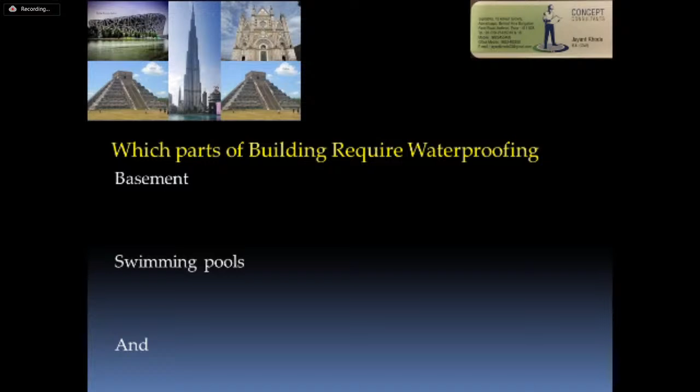And swimming pools also. Which parts of the building, because today we are going to consider only building waterproofing in the building area, so which are the areas you require waterproofing in a building? This includes basement, sunk and non-sunk slabs for toilets, attached terraces, overhead water tanks, underground water tanks, swimming pools, lift pits, podium slabs, top terraces, and expansion joints.

So expansion joints also need waterproofing, we will see that. Waterproofing is to be done during construction, and also after the structure becomes old, you require waterproofing.

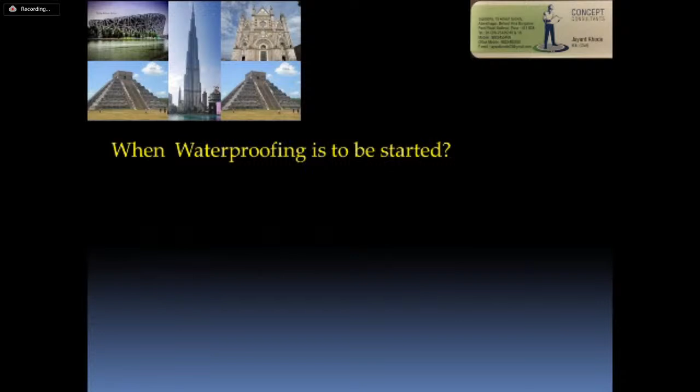In new construction, during design time only, we have to consider different methods so that an effective system of waterproofing can be designed, which will work as per the requirement of a structure.

In old structures, perfect diagnosis is required so that without much breaking, we can do cost-effective waterproofing. It is like medical science, like a doctor diagnosing your health. We as a waterproofing concern have to diagnose the waterproofing problems, why and where the real problem is, and according to that, we will design a system.

Why is appointment of a waterproofing consultant required? Nowadays different consultants are operating on site, so waterproofing consultant is also a need of the time. There are different consultants working on site like foundation, RCC, plumbing, electrical, AC consultant, landscape consultant, acoustic consultant, so why not a waterproofing consultant?

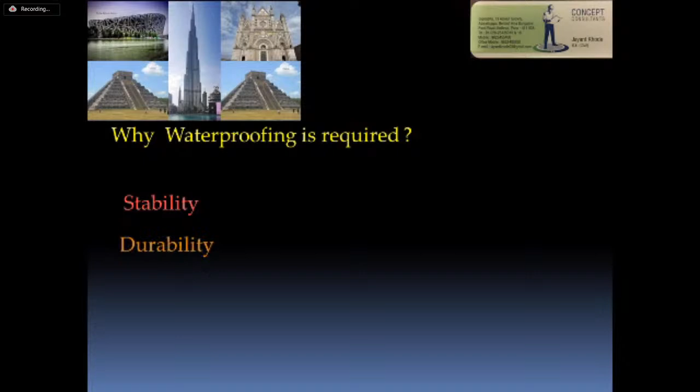Why is waterproofing required? Waterproofing is required for four basic things: stability of a structure, durability of a structure, aesthetic of a structure, and hygiene of a structure. People are going to stay in that structure, so they should have a healthy atmosphere. That's why waterproofing is also required to maintain the hygiene of the structure.

What is the definition of waterproofing? Waterproofing is a systematic method with which we can control entry or exit of water through a structure as per our wish. So waterproofing is not a magic, it is a systematic method, or a science, so that step by step at every stage, if you consider the waterproofing part, then you can control entry of water where you require it to be controlled.

Like basements and lift pits, you require that water should not enter your structure. Where you require exit, in swimming pools or water tanks, you don't require water to exit the structure. So in both cases, entry and exit, you require waterproofing. This has to be considered from the design stage itself.

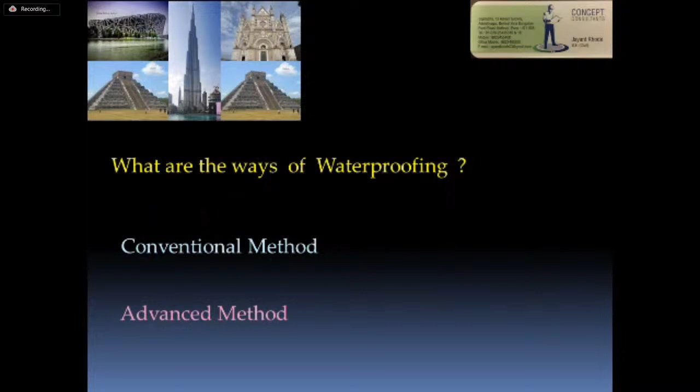There are two methods of waterproofing: one is the conventional method, second is the advanced method. We're going to see all these methods.

Conventional method defines that for so many years, people have been using a few methods of waterproofing. They are trained in that, they have developed confidence in the methods because these are age-old methods. We call these methods conventional methods. These are the few methods of conventional waterproofing: integral waterproofing, brickbat coba, IPS, injection grouting, box type waterproofing.

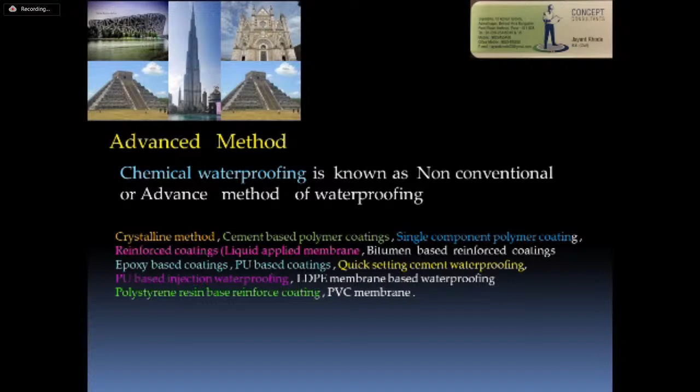Advanced methods: chemical waterproofing is known as the advanced method. Why is it called advanced method? Because only in the last 20 years has this method been developed, and today there are different chemical companies manufacturing high bond strength, high flexibility, elongation property polymers, so that they can use that in bigger span buildings for waterproofing. These are the methods of advanced waterproofing. We are going to see all these methods, but first we have to brush up.

Both methods of waterproofing are useful for concrete. So before going for waterproofing, we should know about concrete.

As you know, because you are all engineers, concrete is made up of sand, cement, aggregates, and water. These give the strength of concrete we manufacture on site. Mortar is an admixture of sand, cement, and water, and these are the different proportions of mortar we normally use on site.

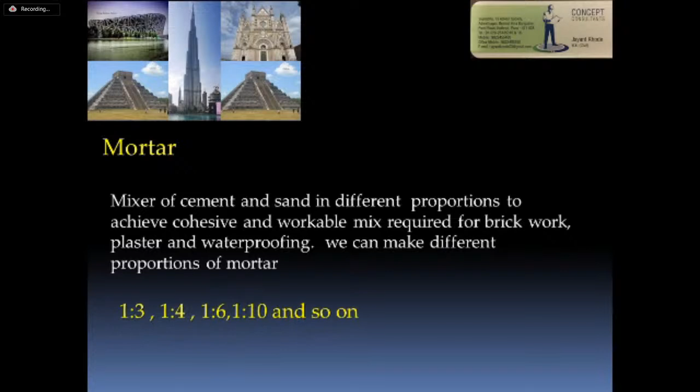What are the limitations of concrete and mortar? Basically, cement is the basic binding material in mortar and concrete, but it has an inherent property that gives you cracks. Shrinkage cracks is a basic property of cement, and that property gives problems of waterproofing.

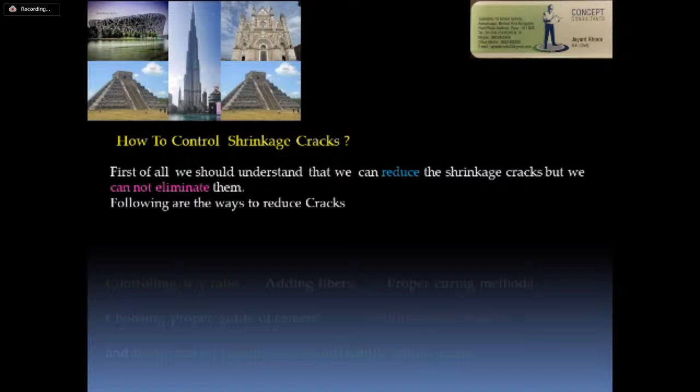How to control the shrinkage cracks? One thing you have to remember is that we can control cracks, we cannot eliminate the cracks. Shrinkage cracks can be controlled by many methods. These are the methods by which we can control the cracks, and we are going to see all these methods in our presentation.

By adding fibers and aerating agents, we can control the water cement ratio. You must have heard in your concrete technology that by reducing water cement ratio, we can increase the strength of cement and reduce the shrinkage cracks. So if you can reduce the shrinkage cracks, you will reduce the waterproofing problem.

Now understand, here's a video, we'll see that video.

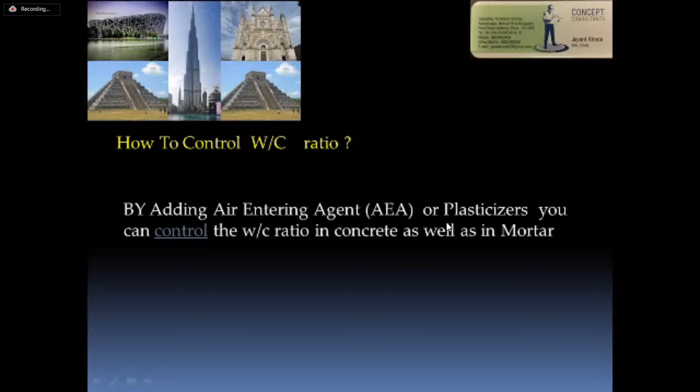So with such types of chemicals, you can reduce the water cement ratio and reduce the shrinkage cracks in the concrete or mortar. You can add fibers also in the concrete to reduce the shrinkage cracks. These are polypropylene fibers, and these fibers give you a three-dimensional reinforcement. Normally, the steel which we use gives you only X and Y direction, but these fibers give you three-dimensional reinforcement, and such reinforcement reduces shrinkage cracks by about 85 to 90%.

Let's see, we have got something to work here. Let's see which video is there. Fiber reinforced concrete, brought to you by Lance Kilbride, Danny Henson, and Derek Dooms. We'll see a different video.

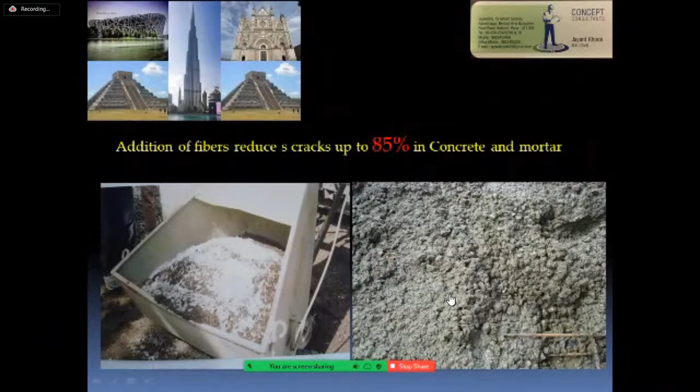In this video, I'm going to show you that the concrete which has been made with fibers will be very difficult to break. The concrete which has not been made with fibers will break within a second. So you can watch this video and understand how fibers give you more strength against cracking and breaking.

Okay, perfect. So you have seen that within 3 or 4 seconds, a concrete without fibers broke. But now we will see concrete with fibers. Okay, ready to go when you are.

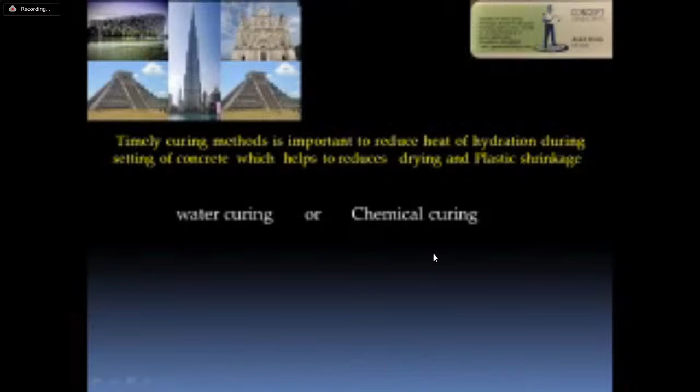Curing also gives you better results to reduce the shrinkage cracks. There are two methods of curing. One is water curing, second is chemical curing. This is a coating we can directly use on concrete after de-shuttering, so that it will form a membrane. That membrane will not allow the water available in the concrete to evaporate out, and the same water is utilized for curing of the concrete. So one is water curing, but nowadays people are using chemical curing, which is called curing compounds.

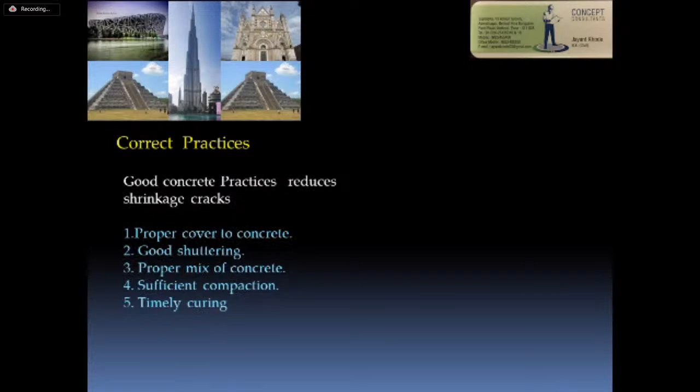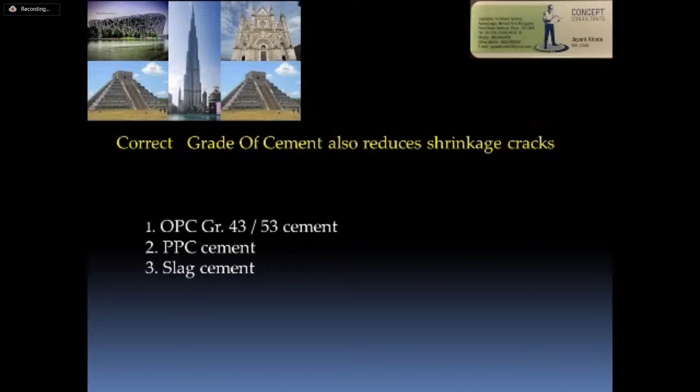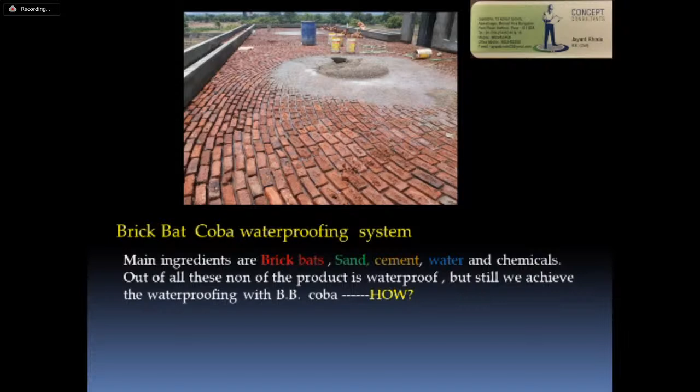Again, brick bat coba, such type of waterproofing, these are the red bricks people use for waterproofing. It gives a better slope. So this system is basically by using brick bats, sand, cement and water, gives you a waterproofing. This is not a waterproofing because it provides you a good slope, and because water doesn't get stagnant on your terrace, it flows off very efficiently.

So in fact, other way it gives you a waterproofing. But all materials like brick bats, sand, cement and water, they don't have any waterproofing quality inbuilt in it. So brick bat coba is not waterproofing again, it is a good drain system.

IPS waterproofing is again a same system to give you a slope, but where you require a lesser thickness or very small slabs, span-wise slabs are small, there people use IPS. IPS is Indian patent stone waterproofing. Instead of bricks, here they use a small stone or metal size, 3/4 inch to 1 inch metal size they use for waterproofing, and that's why it's called Indian patent stone waterproofing. Otherwise, principle is same to achieve a good slope.

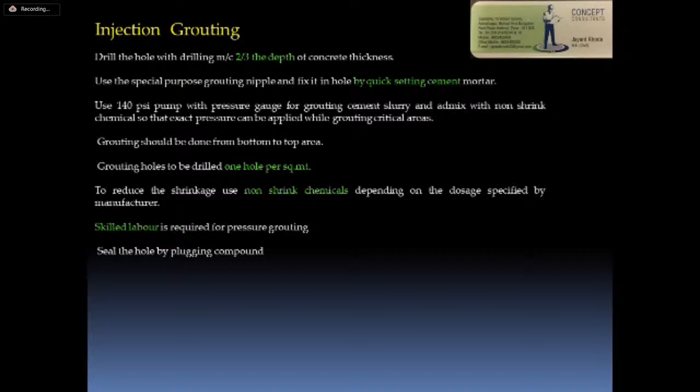Injection grouting, this is a cement slurry grouting. You use a cement, you use a water, some few chemicals to be added in that mixture and make a slurry of this and inject that slurry by gravity grouting or by machine grouting. There are few pumps available in the market with which you can inject a cement slurry which will go in the concrete structure and seal the porosity in the concrete, and in other hand you will get the waterproofing. I'll show you a video here.

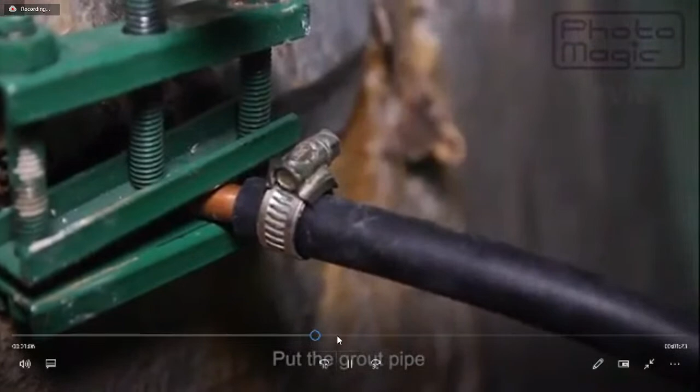This is the way they drill the... this is a mechanical pump. It has got PSI pressure, something about 1000 plus PSI. And with the help of this pump, this is a ready-made chemical which can be used for grouting. It comes as a powder. You have to add water in this chemical. We'll see this demo.

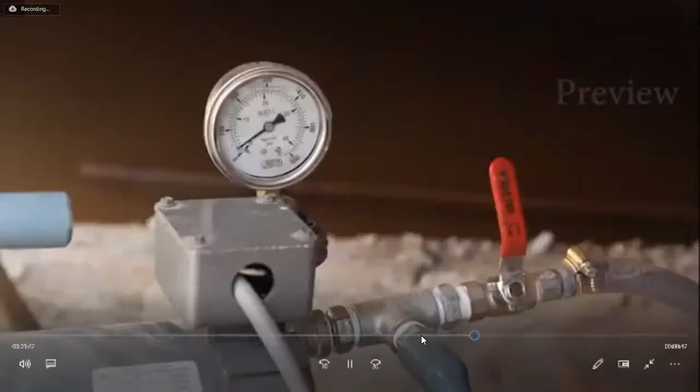So now with this pressure, the contractor is pushing this cement slurry in the concrete. This is a bad concrete. This is going inside the concrete and sealing the porosity in the concrete. After the particular level pressure has been achieved, they will stop this grouting and they will seal this hole.

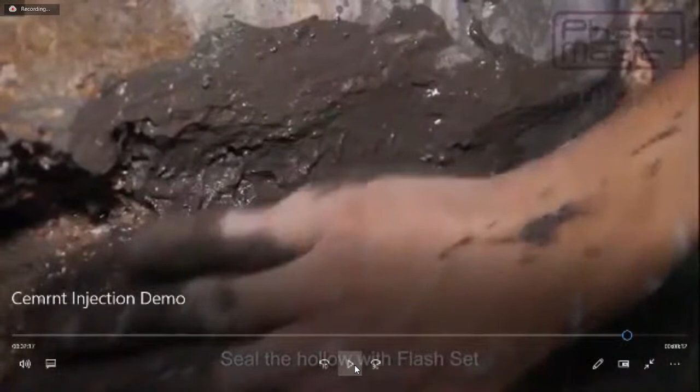This way, they are sealing the holes so that entire slurry goes inside the concrete. It sits there and permanently water has been stopped. Now we'll go for an advanced method of waterproofing. As you know already, chemical waterproofing has been known as advanced waterproofing, and there are different methods of waterproofing. So step by step, we'll see all these methods. Let us go ahead.

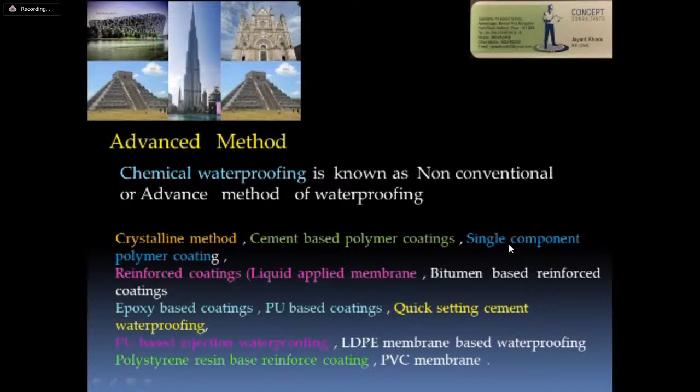Crystalline method. Crystalline chemicals are the chemicals which can be applied on a concrete, freshly laid concrete, and these chemicals react with the free lime available in the concrete and seal the porosity in the concrete, and entire concrete becomes waterproof. I'll show you a video of this. This is the way it becomes, and here's a video.

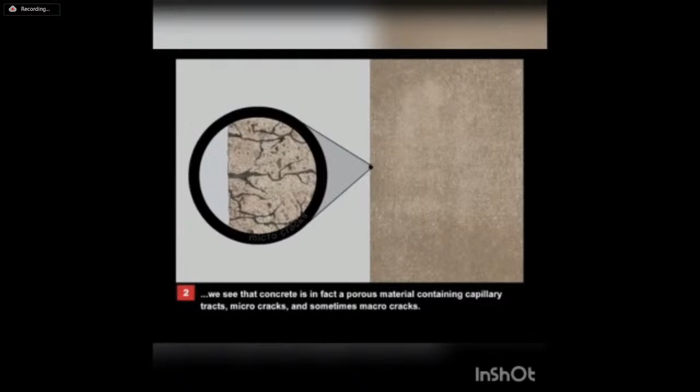Concrete appears to be an impermeable solid mass. However, upon close examination, we see that concrete is in fact a porous material containing capillary tracts, microcracks, and sometimes macrocracks. This is a magnified view of a capillary tract in concrete. Note that the walls of the capillary are lined with the byproducts of cement hydration and unhydrated cement particles. When concrete is wet, the capillary tracts become saturated with water. Calcium hydroxide and other soluble byproducts of cement hydration dissolve in the capillary water, while unhydrated cement and other non-soluble materials remain on the walls.

For existing concrete structures, the Xypex crystalline technology is applied as a coating to the concrete surface.

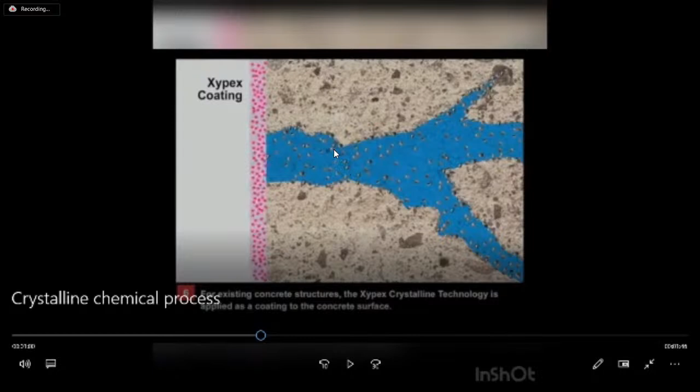This is a red color, is a chemical which we normally apply on a saturated surface. So with the available water in the capillaries, they will form a reaction with the available free lime in the concrete, and then this is the way they will form the crystals.

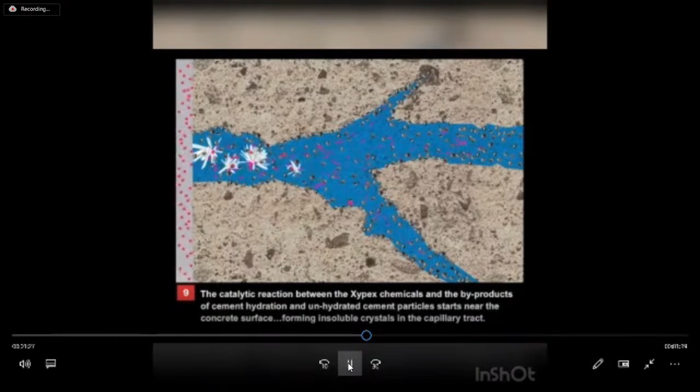When the highly concentrated Xypex coating comes into contact with the capillary water, a chemical differential is created. Driven by this chemical differential, the diffusion of Xypex reactive ingredients into the capillary begins. The catalytic reaction between the Xypex chemicals and the byproducts of cement hydration and unhydrated cement particles starts near the concrete surface, forming insoluble crystals in the capillary tract.

So this is the way crystalline method is to be adopted for waterproofing. This can be very easily applied on site. No skilled labor is required. And this is also a very economical method. This is a small drawing we can share with you. Already you are getting this recorded, so you can have this drawing of waterproofing.

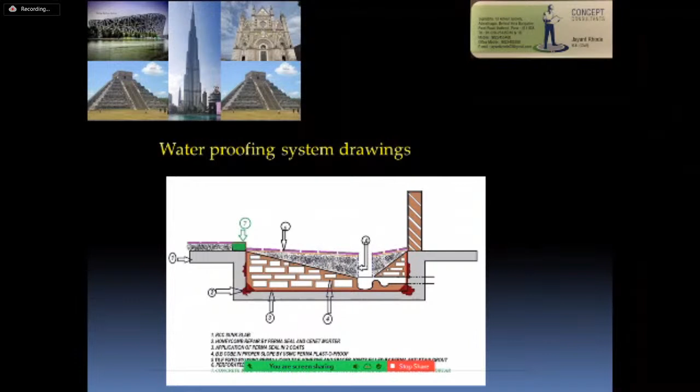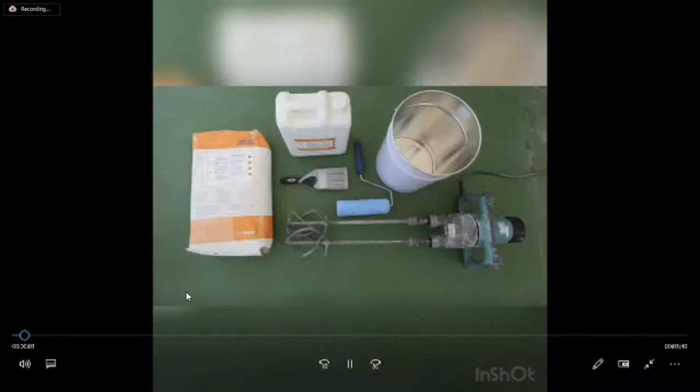Another method of waterproofing is cement-based polymer coating. So there are two components, a powder and a liquid, mixed together and directly applied on a surface. We'll see this demo. This is a liquid component. Now it is a powder component. They are mixing on the site as per the pre-measured quantity supplied by the manufacturing company.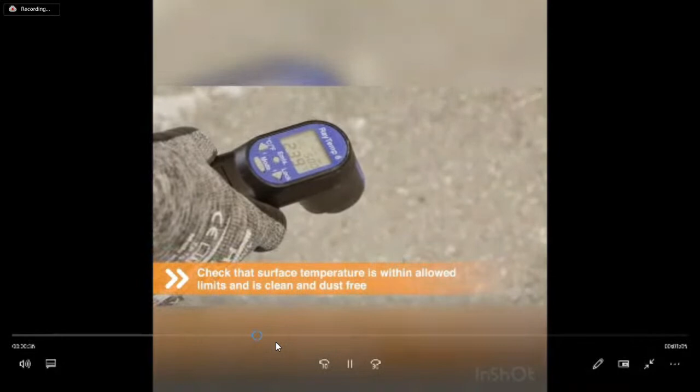You have to also see that the applied temperature of the concrete should be lower. You cannot apply on hot concrete. Normally in the summer season, concrete temperature goes up to 60 to 65 degrees centigrade. So on that hot concrete, you cannot apply such type of things. So you have to control that temperature by spraying water on the concrete and reduce the temperature. And once the temperature reduces, then start application of the coating.

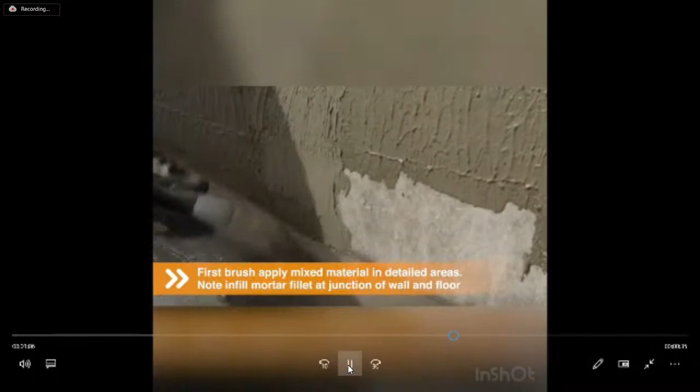This is a crack filling and honeycombing repair in the concrete. Now you can apply with a brush. Or you can use a roller also, which will give you a very good smooth finish and desired coverage on site. So this is a method of cementitious polymer coating for concrete slabs.

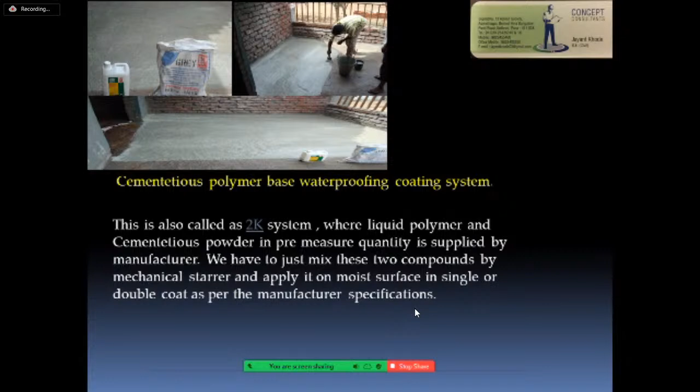If a span of a slab is more than maybe 1000 to 2000 square feet, then you require slightly better flexible material, and such type of acrylic coatings are available in the market, which have a flexibility of about 300%. In this type of coating, no cement is required. This is a ready-made product. No curing is required. It is directly to be mixed with water and applied on the concrete slab. I'll show you a video of this.

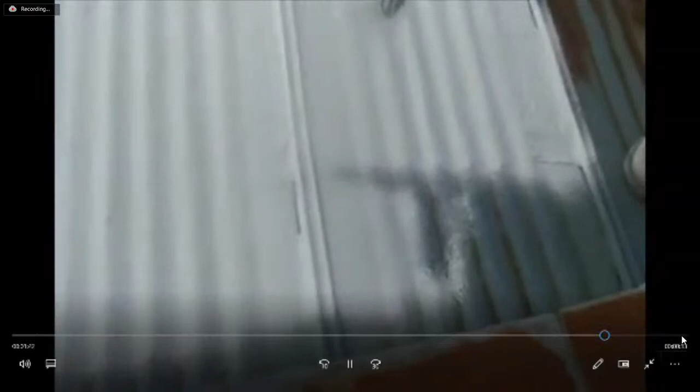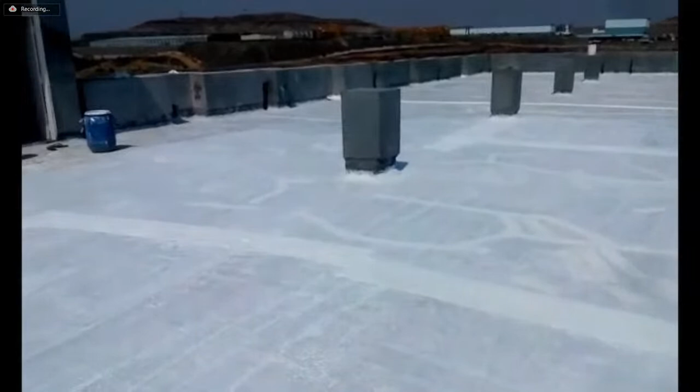You can also use rollers. This is a terrace where the applicator is using a roller, and then it doesn't require any protection because such coatings are UV resistant and you can directly walk on this surface. Nothing will happen to these coatings. Normal walking or pedestrian traffic is absolutely okay. This is a site, I think, one of our applicators has done on the Pune-Satara road.

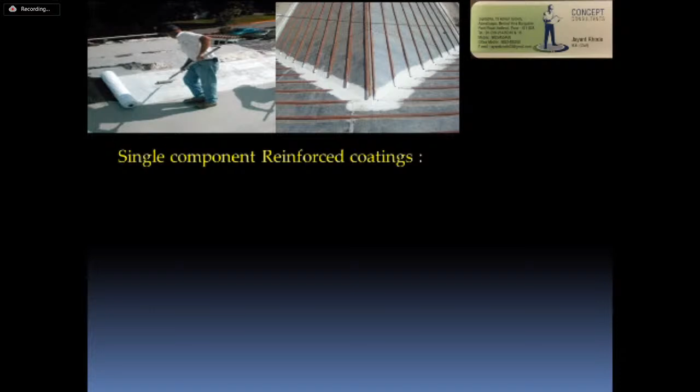Now, if the span is still bigger, people are using about 5,000, 10,000, 50,000 square feet area, then you may go for a reinforced coating. The same product chemicals are used with some reinforcement, and then you get better tensile strength in the coating, which will resist future cracks in the concrete. I'll show you the video. So if the span of the concrete is huge, then you can use such type of reinforcement.

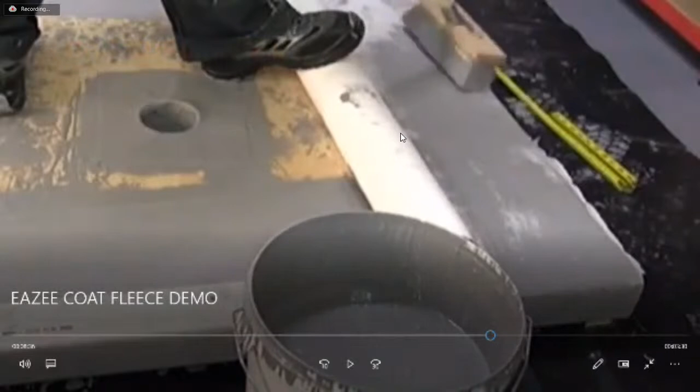Fabric, and lay along the perimeter. This white color fabric is a coating membrane. Place the trim onto the wet coating and fix mechanically in place. Lay the field area, 1000 millimeter fabric, up to the horizontal edge of the trim. Coating, fabric, coating. This roll is called a reinforcement cloth or fleece. In our technical term, we call it fleece, F-L-E-E-C-E. And the thickness of this cloth depends upon what DFT, dry film thickness, is required for the coating. It ranges from 50 GSM to 150 GSM. This all depends upon the site condition and the consultant requirement.

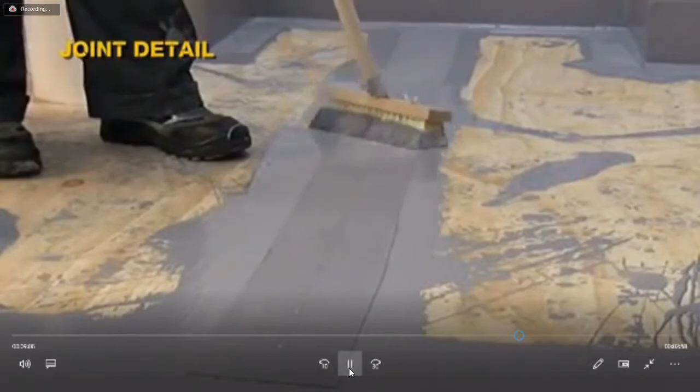Before proceeding with the field area, use 250 millimeter wide fabric to lay the perimeter detail. Coating, fabric, coating. Joint details: using 150 millimeter fabric across all joins in the deck surface. Coating, fabric, coating. Line up the 1 meter wide fabric roll with the edge of the deck, overlapping the existing detail work. Care should be taken to line up the fabric roll so that a straight edge can be achieved for the length of the pass. Apply a base coat.

Use the brush with a prodding motion to firmly embed the fabric. Fold back the outer section of fabric and apply a base coat up to the perimeter. Fold back and embed the fabric using the brush. Apply a base coat of liquid. So this is the way people are using membranes in waterproofing. These membranes are called reinforced membranes, which will give very good tensile strength to your waterproofing coatings.

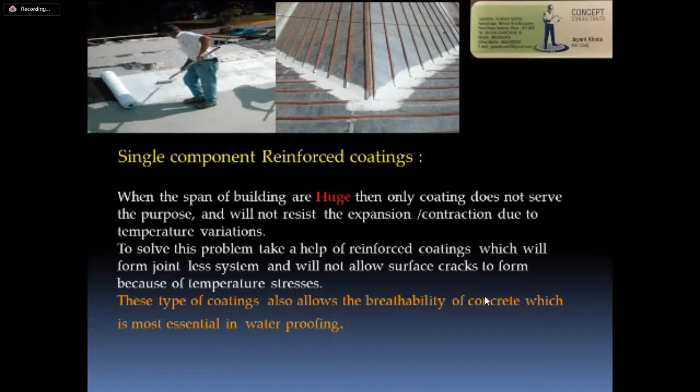Bitumen-based waterproofing. This is a very old system, but now people have changed the specification in the system. Bituminous reinforced coating has also been used.

There are two methods of this membrane. One is torch-on applied; a petrol torch is required to lay this membrane on the surface. And secondly, this is a cold applied thing, so people use primer to apply the membrane or the coating. This membrane comes in the sheet form and can be directly applied on a surface.

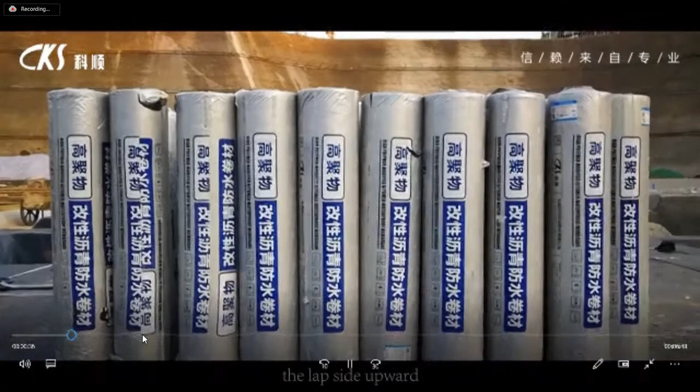Yeah, this is a torch-on membrane. So people are using a torch. the lap side upward, inside and outside, and then cut a piece of round shape. So this is a torch they are using. Next, hot melt the overlap edges.

Use a spraying gun to fully bake the overlap edges until molten bitumen is extruded from the edges to form a uniform 8 mm bituminous strip. And make sure the two layers of the overlap edges are fully bonded. At the end, put bricks on top of the position.

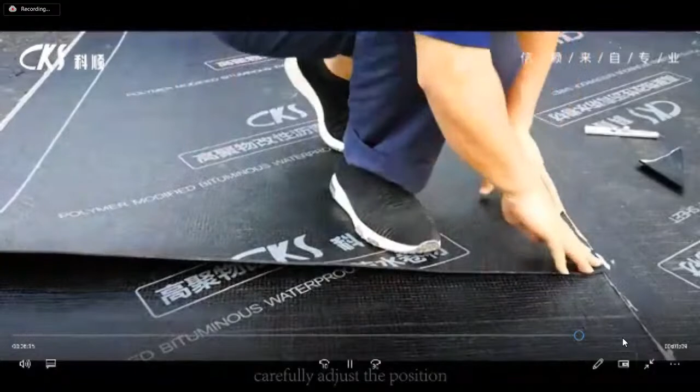And roll the membrane after the stress is released, about half an hour. Then start the large area point bonding construction. Bond no less than 5 points per square meter. The 7th step, lap joint construction. The overlap edges should be hot melt fully bonded.

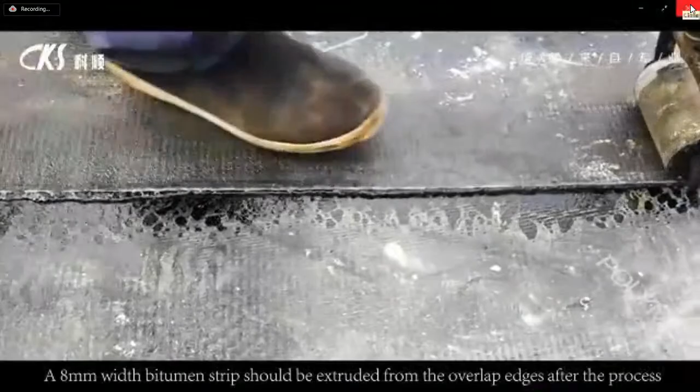One worker conducts the hot melt procedure while the other worker follows after him and performs the air exhaust and compression process with a large press roller. An 8 mm width bitumen strip should be extruded from the overlap edges after the process. So this is the method of bituminous membrane by torch-on, hot torch. But there is another method. Let's see.

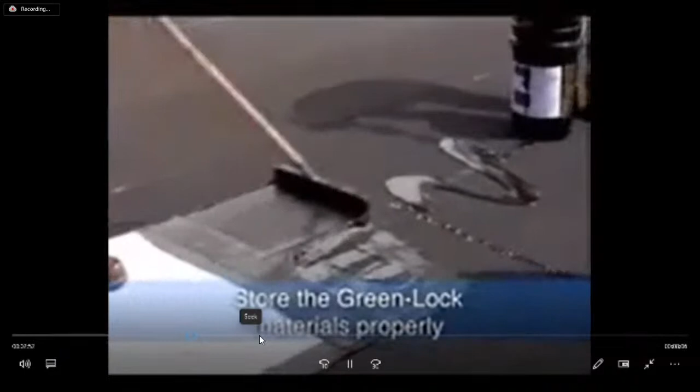Yeah, this is one which can be used by a primer method. I'll show you this, I'll just slowly go. The Green-Lock products will take longer to cure. Store the Green-Lock materials properly to protect them before use. Keep dry and at 70 degrees Fahrenheit for complete requirements.

Epoxy-based waterproofing is another method where hardener and resin are mixed together and applied with a brush or a roller so that you get a continuous membrane form. This becomes a plastic membrane. But friends, this method is not UV stable. You have to put plaster or some cover on this epoxy membrane so that it will give you better life. You cannot keep these membranes exposed. Let's go further.

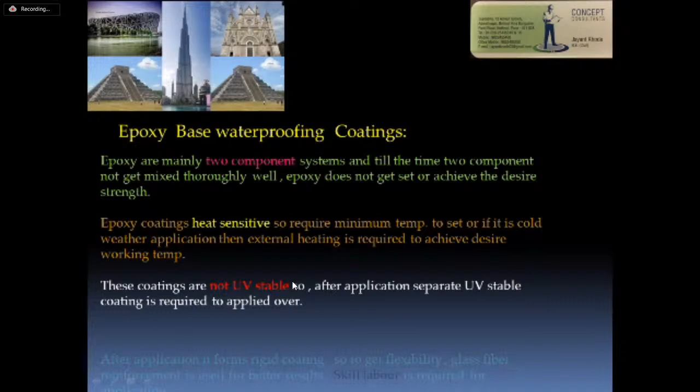Quick setting cement-based waterproofing. Many times on site, we observe that while doing concreting, we come across oozing water from the basement. We'll see that video. Till the time we don't stop that oozing water coming from the ground, we can't do the concreting. In such a situation, you require a fast setting plugging compound which will stop your water instantly, and then after stopping the water, you can start your concreting.

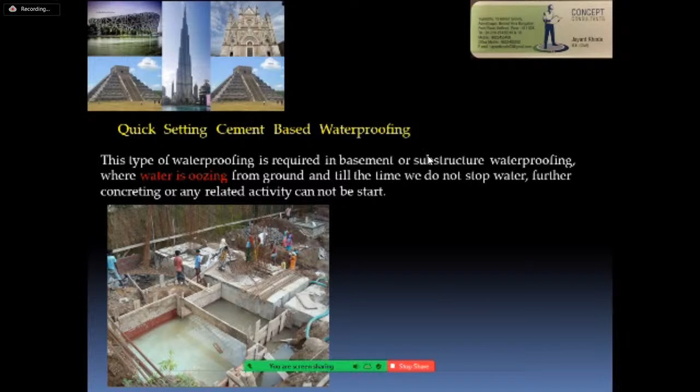Now, if that oozing of water is there, we just can't do the concreting because water will get mixed with the concrete and the strength will be reduced, or will not be achieved. But next, what will happen? This is a fast setting cement. You can see.

So you have seen that this oozing water can be stopped within 30-40 seconds, and then you can take up further concreting. So such quick setting cements are also required on site to stop oozing water from rocky or maybe from sandy soils.

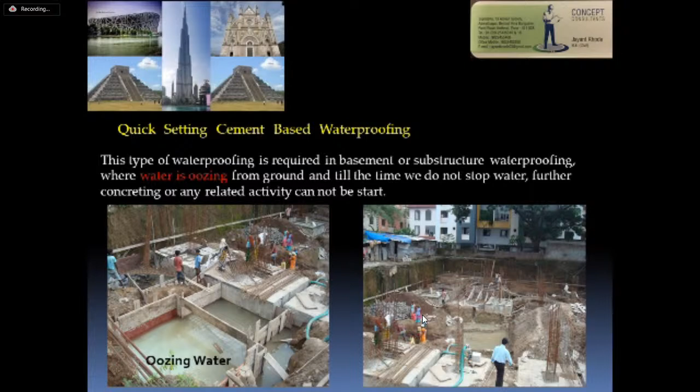LDP membrane waterproofing. LDPE stands for low density polyethylene, and this is a ready-made membrane. The size of these membranes comes from 25 meter by 7 meter. That is, one piece of this membrane is around 2,000 square feet. If your basement size is 5,000 square feet, then hardly 2.5 membranes are required. Then there are no joints.

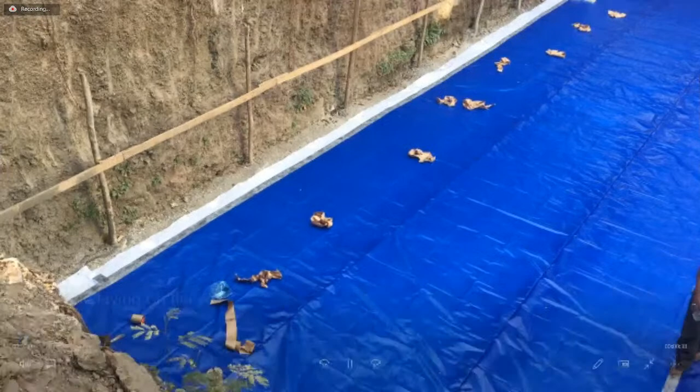It's an almost jointless system, and this is loosely laid on a PCC, and after that you do the concreting so that the water rising from the bottom is completely stopped. I'll show you some videos here. Yeah, this is the way people use this membrane. This is a membrane loosely laid on the site. This is before the raft has been done, and this gentleman is doing joint sealing.

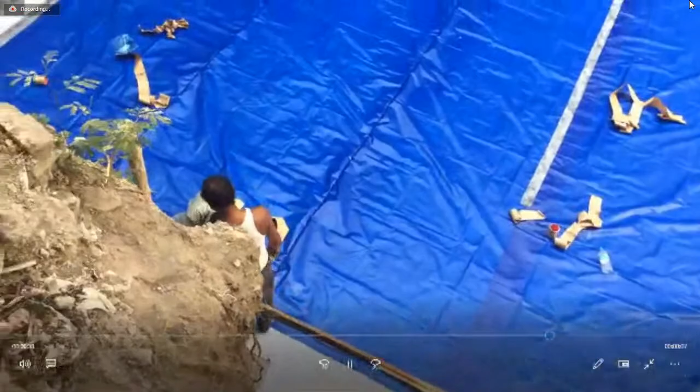This is, I think, a 5,000 square feet site, and very few joints are there. Only one joint here, the next joint is there. So this is the way people are using this membrane. After that, they seal the joints.

This is the way they seal. This ready-made tape is available, and after that tape, they are using this polymer coating, which will give better strength to the joint, and the joint will not give any leakage. So this is the way they use joint sealing.

And these are detailed photographs, step-by-step photographs of how people use such membranes on site. This is LDPE, low density polyethylene. Once it goes below the ground, the life of this membrane is more than 100 years. If it's kept exposed, the life of this membrane is 25 years. So below the ground, it is more than 100 years. Cost-wise, it is very, very economical as compared to box type waterproofing.

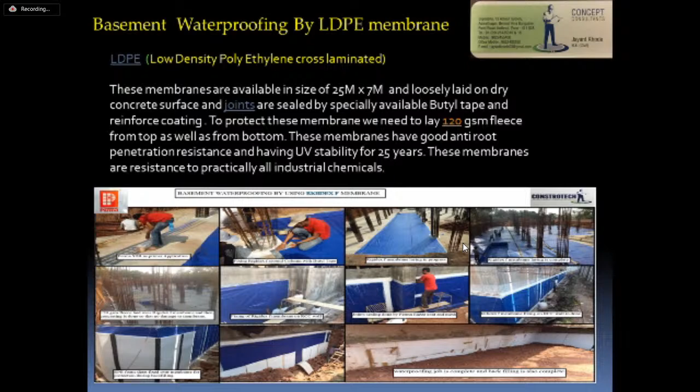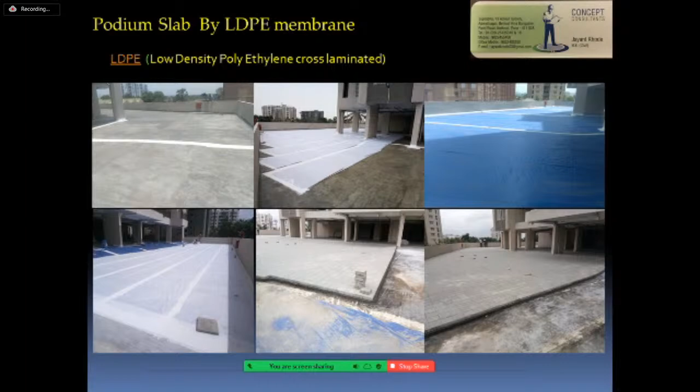Now we will see a different membrane, called butyl membrane. These membranes are ready-made tapes, and these tapes can be used to seal metal-to-metal joints or industrial J-hook joints. These are ready-made things. I'll show you a demo here.

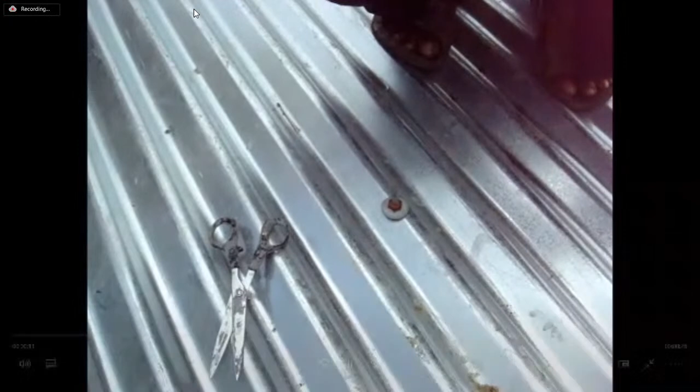This is a J-hook. Normally these J-hooks get rusted and water starts penetrating from the J-hook in the industrial shed. So we have to seal the joints by using butyl tapes.

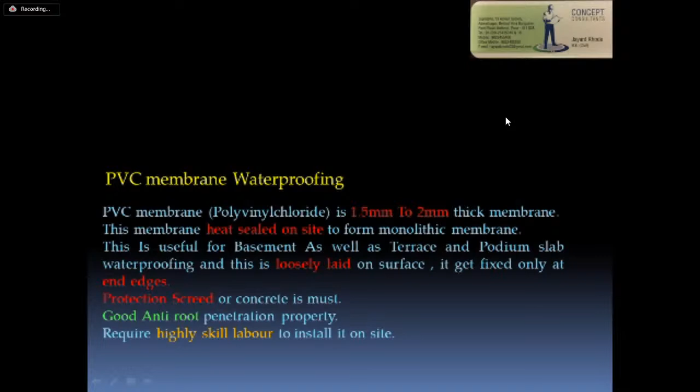PVC membranes. PVC stands for polyvinyl chloride. These membranes come in 1.5 mm to 2 mm thickness, in rolls of maybe 10 or 20 meters. This type of membrane really requires skilled labor to be handled on site, because it is applied with a hot air gun. I'll show you a demo.

Sorry. Sorry, the video is not running. We'll go ahead.

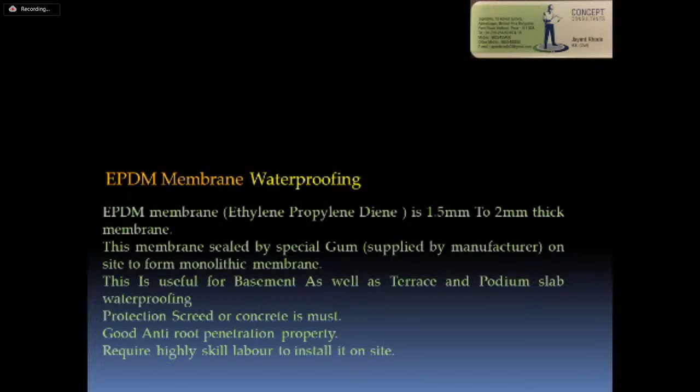This is another type of membrane waterproofing. These are all membrane waterproofing; I'm just giving you an introduction. It is really difficult to explain all these membranes in such a short time, but you can have a look at the different types of membranes. EPDM membrane, ethylene propylene diene membrane. This again is 1.5 mm to 2 mm thickness, and you can use such membranes for waterproofing. I'll show you a demo here.

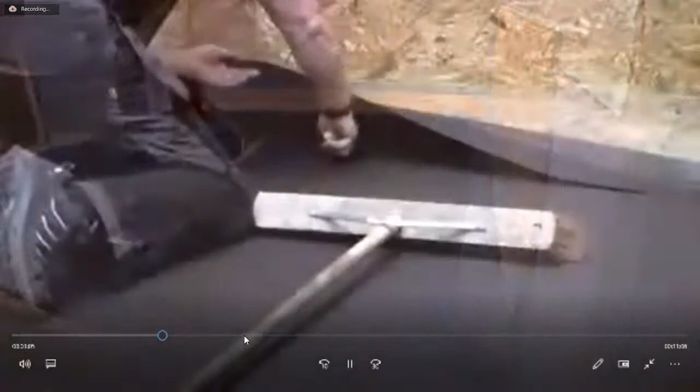We normally use brush and roller for application of this gum, but these are advanced countries. They use spray for applying gum on both surfaces, so that a uniform thickness of gum is achieved and you get better coverage. And this is where they applied the membranes. So this is another membrane we use for terrace waterproofing.

French drain system. This is a waterproofing system, but the waterproofing is achieved by draining the water out of the basement area. So there are different pipes and belts available through which groundwater can be drained out of the basement, and then you get better waterproofing. Let us understand how they do it.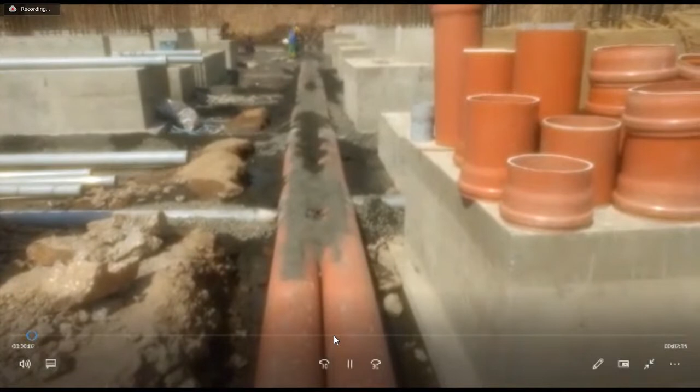What we are seeing here is essentially a French drain system. This is a video we have taken from one of our sites where we have used pipes having holes on the bottom, and we are draining out the entire water from the basement and reducing the water table so that the water level will not rise in the basement.

Now you will see if the water table rises, water will go into the holes first because of capillary action, and then it will get drained towards the drain. The perforations that enter the pipe are covered with aggregates from bottom as well as from the sides.

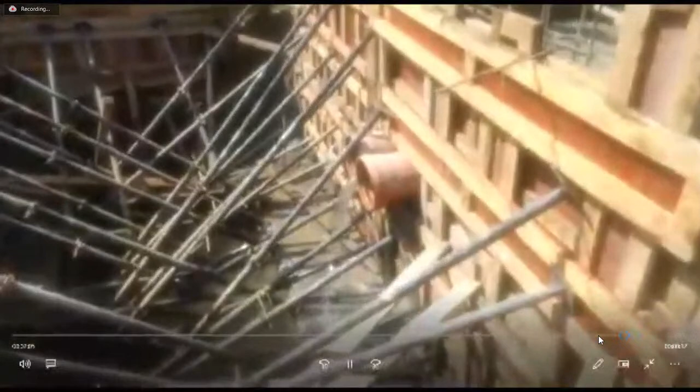The sump well has to be dewatered continuously, because if water pressure is allowed to build up inside the sump well, then the water will flow backwards and the entire system will be rendered useless. So as you can see, once the filling has been completed, water will start entering from these pipes.

This proves that our system has been successful. From one point, we have drained the water to the sump well, so the other area becomes absolutely dry and you achieve waterproofing. So this is another method by which, through draining of water, you can achieve waterproofing.

Liquid applied membranes. You have seen the different preformed membranes available in different shapes and sizes, maybe 25 meters by 7 meters or 1.5 meters by 2 meters. But here this is a liquid available. You can apply this liquid with a brush or a roller, and after drying, the surface becomes a membrane. I'll show you the video here.

Before application of any membrane, the concrete surface should be clean. This particular contractor is using an air blower to make the concrete absolutely dust free, and after that he will apply a coat.

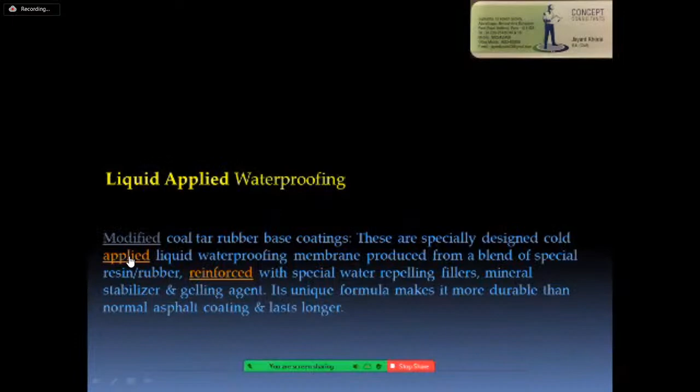This is the way they apply a primer coat on the surface. You can use a brush or a roller so that the entire concrete surface becomes dust free, and after the primer dries, you can start applying a reinforced coating.

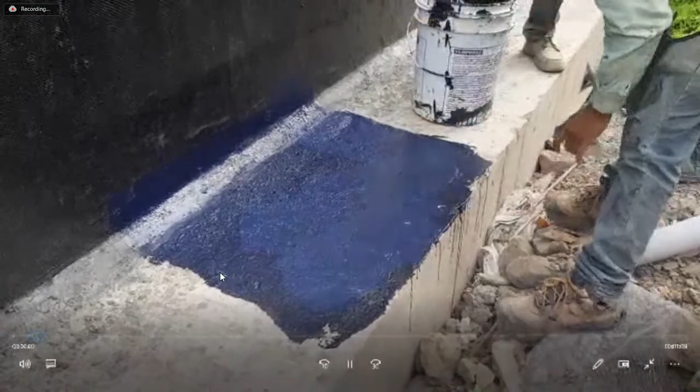I'll show you here. This is the way they use a roller to apply the first coat. This is a mesh cloth, which can be used as a reinforcement cloth in the membrane or coating. They will embed this cloth in the coating as shown in this video.

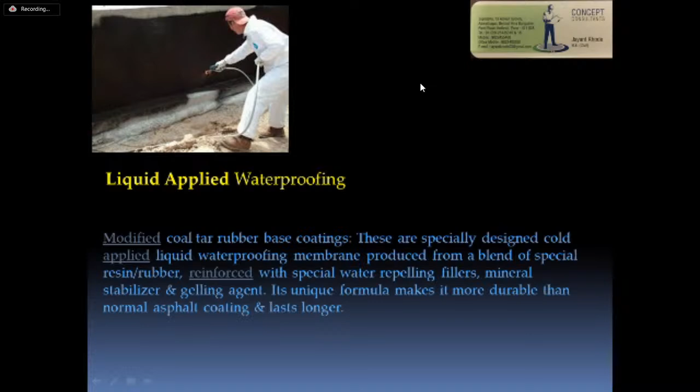These are a few photographs where this particular person is using a spray, and after application of the spray, such types of membranes form on the concrete surface.

Grouting method. We have already seen cement grouting, but now we are going to look at a very advanced technology called PU, which stands for polyurethane grouting. This chemical expands in contact with water, expanding 20 times and setting within 20 seconds.

So if water is flowing in the basement area, you inject this liquid into the available water and it stops the water instantly. I will show you a video for this.

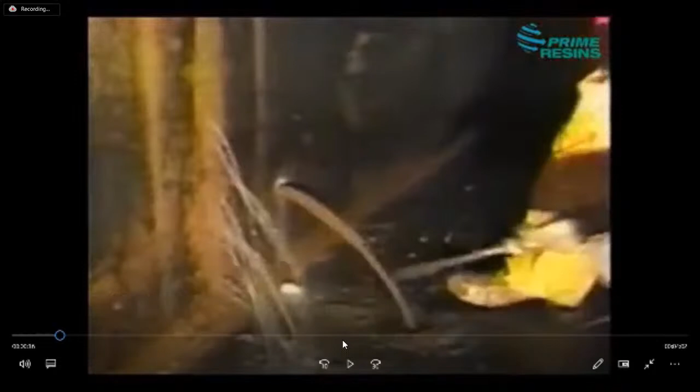This is the water which is flowing in the basement. This contractor has drilled a hole here just to inject the PU from here. Now he is inserting a nozzle for grouting, and now he will start the injection grouting.

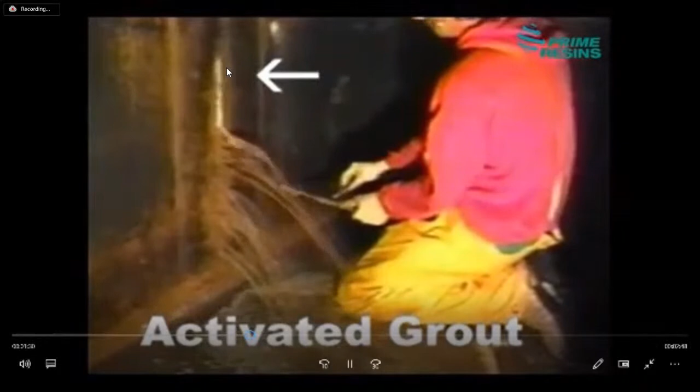Now he will be starting the PU grout. After a few seconds, you are going to see the PU grout coming from this area, marked by an arrow. It is coming out and setting so fast that the water is getting stopped, and after about 3 minutes you will see all the water gets stopped.

I will go slightly further fast, you will see here. Slowly and steadily, the entire water is getting stopped. This is a continuous video, and the water is stopped permanently. So this is a type of injection grouting.

It can be used while water is flowing, so this is very, very advanced. No doubt there is a cost, but in areas where you want to stop water instantaneously and can't go beyond the structure from the positive side, this is the best method. You can do it from the negative side.

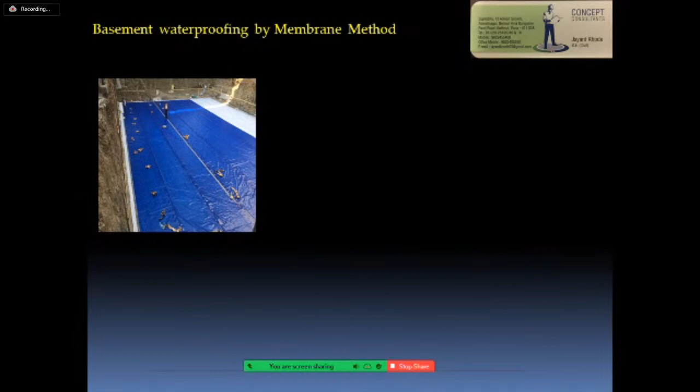So this is another drawing for basement waterproofing. This is another method we will show you here in photographs, a loose laid membrane, and then your basement becomes waterproof. Again, for podium slabs, the same method applies. I think we have seen these photographs.

I think so. We will stop here because these are typical applications of these membranes for toilets, and this is very lengthy, it will take 1 or 2 hours. So we'll stop here. Now you can ask me some questions if you have any in your mind.

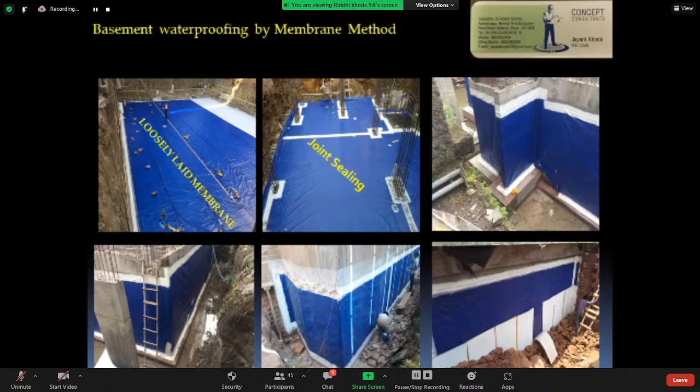In the last slide, you can see this foam sheet, which is 25 mm thick. We paste this sheet on the membrane before backfilling, so the foam protects your LDPE membrane from further damage. Such foam sheets are available in the market and can be used to protect the membrane from damaging.

Sir, what are some new recent innovations in waterproofing technology in the market? What I just showed you, all of these are new innovations. These membranes and coatings have only been available for the last 5 to 6 years. This is absolutely new technology.

What is the duration till when 100% efficiency is maintained for the waterproofing? I did not get you. What is the duration till when 100% efficiency is maintained for the waterproofing? You can get that efficiency till the life of your building.

If the waterproofing execution is done correctly and it has been decided from the design stage itself... because normally people start thinking about waterproofing only after completion of the basement or terrace, but people should start the waterproofing concept from the design stage itself. Once your building is under design, at that time you should also start designing the waterproofing, so that drawings are nicely prepared, specifications are laid down, and then step by step, at every stage, you can implement the waterproofing. That system can then remain effective up to the lifetime of your building.